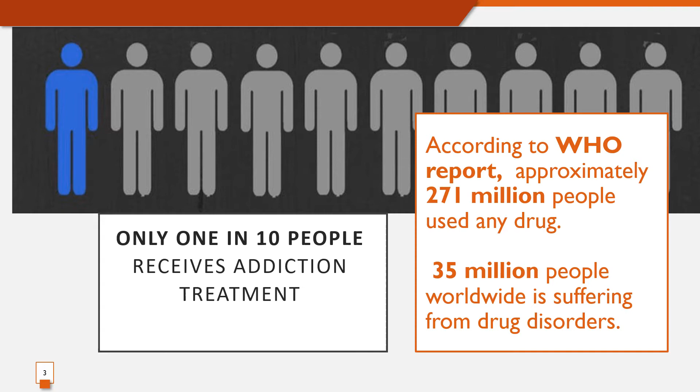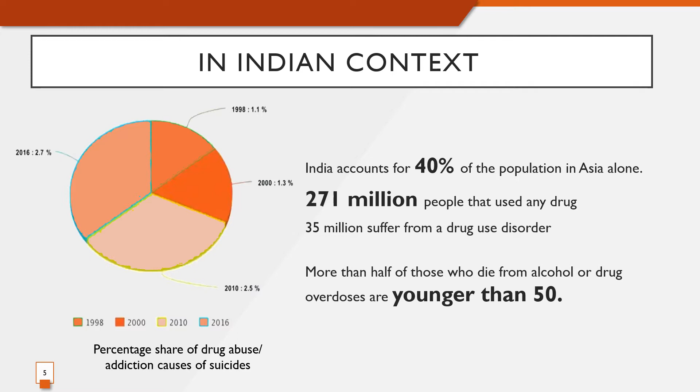Coming to the Indian context, this chart shows the percentage share of drug abuse or addiction causes suicides. It is clear that the drug abuse suicide cases increase over the years. More than half of those who die from alcohol or drug overdose are younger than 50.

With the new ages, there are many substances which are coming. Alcohol and tobacco have been the commonest, but newer substances like stimulants, like in the newspaper we read about the drug called MCAT, these are wrecking havoc on the lives of teenagers and adolescents. In many centuries, substance abuse has been a social problem.

According to the Kerala Anti-Narcotic Force, 1 in 3 uses drugs at least once during school year. 34.8% of the youths are addicted to drugs, liquor, or smoking. The population in Kerala for 2020 is 3.47 crore.

The actual number of alcohol-dependent individuals is around 2,08,200. According to the analysis of revenue from liquor sales in 2015, the revenue sale was approximately 12 crore, and in 2019 it has increased to above 14 crores approximately. Kerala has the highest per capita consumption of alcohol in India.

A total of 350 cases were charged in the last 12 months. The newspaper report in 2020 shows that the lack of alcohol kills more in Kerala than COVID-19. In the 6 days leading up to March 30th, Kerala recorded only 2 deaths from COVID-19, but at least 6 deaths from non-availability of alcohol. Therefore, the Kerala government has planned to open more de-addiction centers across the state.

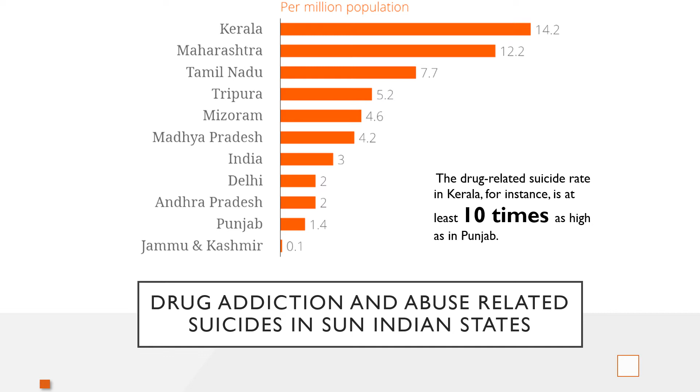Next, let me introduce my site. This graph shows the drug addiction and abuse-related suicide in some of the states in India. Kerala is 10 times higher than Punjab. In Kerala, the highest number of substance addiction is reported mainly in 3 districts, namely Trivandrum, Ernakulam, Kozhikode. In northern Kerala, the cases are higher in Kozhikode.

My site is located in Modakulur, Ulliyeri village in Kozhikode district in the state of Kerala, India. The site area is 10.03 acres, that is 40,621.80 square meters. It is located 500 meters away from the Malabar Medical College Hospital and Research Center. It is about 18 kilometers from Kozhikode city.

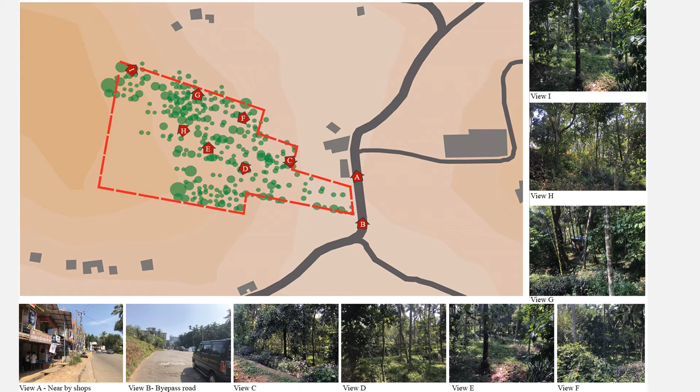The feasibility of the site is that it is well connected to a hospital within a close proximity of 500 meters, which can be accessed in case of any emergency. There is also an institutional campus at a radius of 1 kilometer, which helps in creating awareness among them.

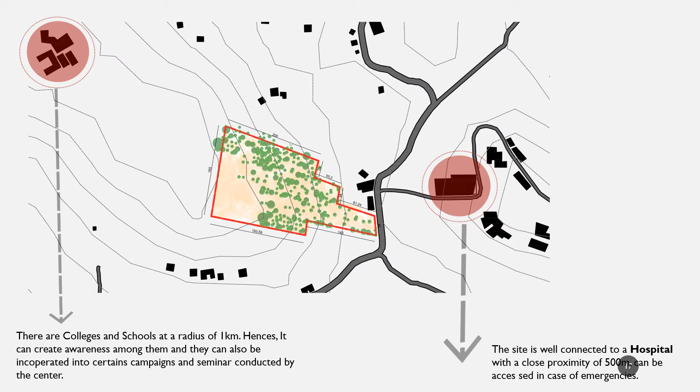The site is sloped with 2 meter intervals, and the highest point of the site is 8 meters from the road.

The case studies I have chosen for my thesis are Alpha Healing Center, Gujarat; Center for Harmonious Living, Kuttipuram; and Muktangan Rehabilitation Center, Pune. I have done a critical analysis of all 3 case studies based on a few parameters.

The reason I chose each of these case studies: for the first one, CHL, my idea for the design was to create a deinstitutional approach, and CHL matches with my concept.

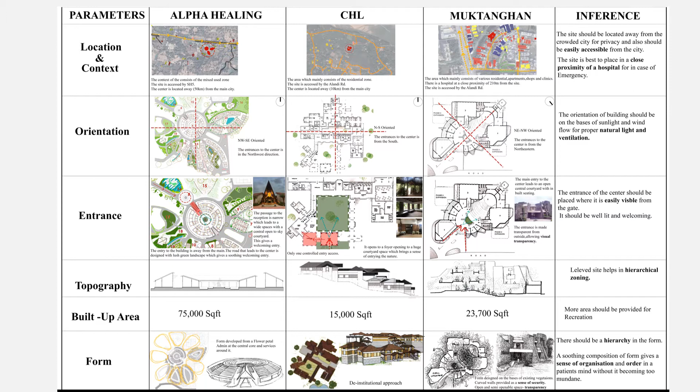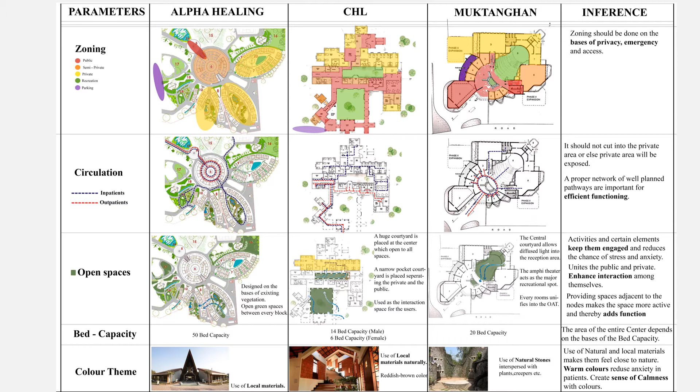For the Alpha Healing Center, the site area was approximately similar to my site area, so I wanted to study how they did the zoning of different blocks in the center and how they utilized the site area efficiently. I also planned on giving a central OAT that can act as an interactive space between the users.

And so I chose Muktangan Rehabilitation Center, as it also gives transparency between the users and staff.

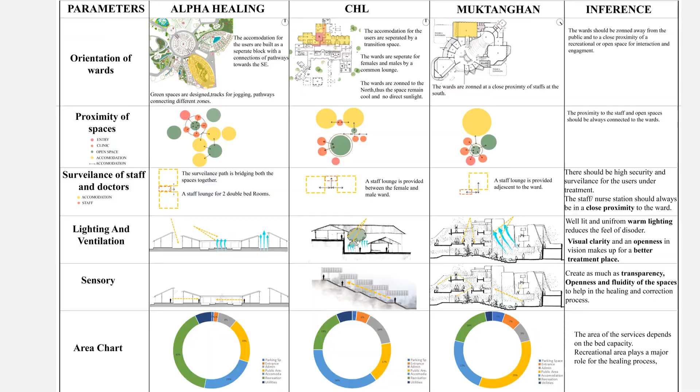Moving on to the major programming involved in the center, the 2 types of patients are inpatients and outpatients. The design shall house the following facilities: admin, outpatients, inpatients, care units, recreational facilities, and dwelling units.

The primary activities involved in the centers are consultation, counseling, therapy, self-help groups, detoxification, medical treatment, gym, yoga or meditation, outdoor games, indoor games, workshops, and camping.

Engaging in group therapy or activities is an essential part of recovery when it comes to substance abuse. Working in groups can have quite a few benefits for the individual, as they get to have the experience, learn new skills, gain insight, etc.

Moving on to the brief requirements of the center, let us first see the outpatient service. The initial consultation involves taking admission and then moving on to the intake process, which collects information about the patient's drug history. This is followed by evaluation of the patient's health through lab tests, after which the patient's treatment stages are identified, such as counseling, detoxification, therapy, etc.

Moving on to the zoning part, the site is initially split into 3 zones: public, which includes OPD, casualty, etc.; semi-public, which includes OAT halls, multipurpose halls, etc.; and private, which includes IPD wards, etc. The structure is zoned away from the main road access for noise buffer and privacy.

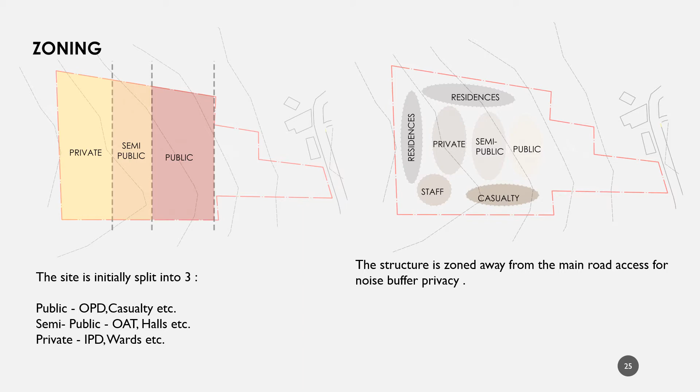Approaches to healing include removing stigma, incorporating interactive spaces, and creating spaces where people can come together and interact. Architecturally, this provides a platform for people to get back into their social place.

For zoning and conceptual development, the spaces are divided into 2 major spaces: the built space and the recreational space. Moving on to the design strategies involved.

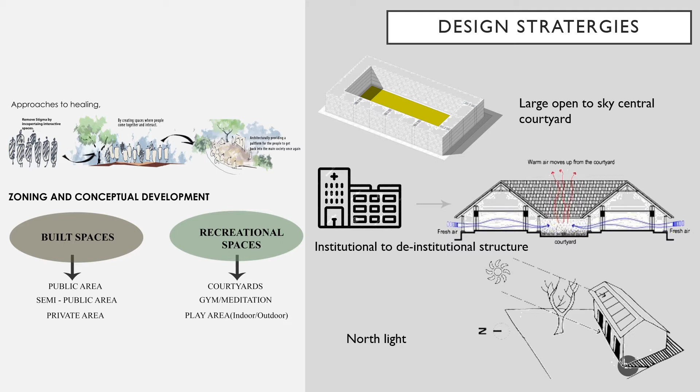First, a large open-to-sky central courtyard gives a sense of openness and also acts as a multi-purpose gathering space, moving from an institutional to a deinstitutional approach to give a homely feel, exposing users to fresh air and nature.

On the basis of sunlight, strategic tree planting around the structure can help protect windows from the late afternoon western summer sun. Shading devices, such as pergolas fitted to verandas, allow sun to penetrate the internal space while blocking harsh sunlight. Eaves and shading devices also protect windows from direct sunlight.

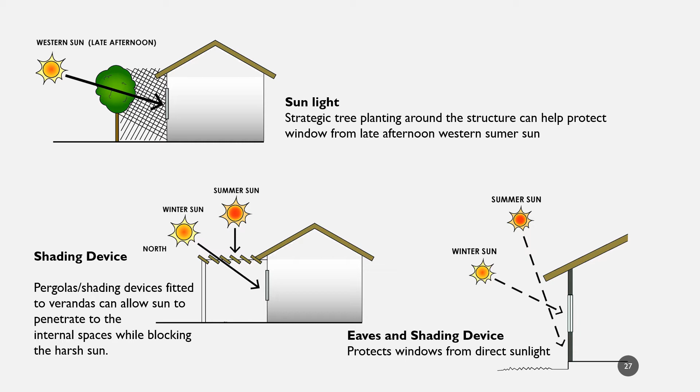The next major aspect is the interaction between patients and staff, creating open and semi-open spaces between them for maximum visual transparency, enabling secure and safe surveillance.

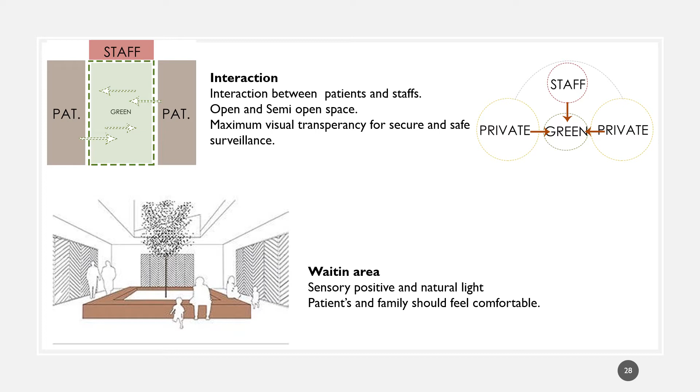The waiting area should have sensory-positive and natural light where patients and families feel comfortable. Planning the building around the courtyard reduces the heat entering the building and also acts as a semi-public gathering space between users.

The patients' and family accommodations are zoned in close proximity so they can interact and spend time together in a green environment, with naturally lit corridors using vertical shade elements to create rhythm.

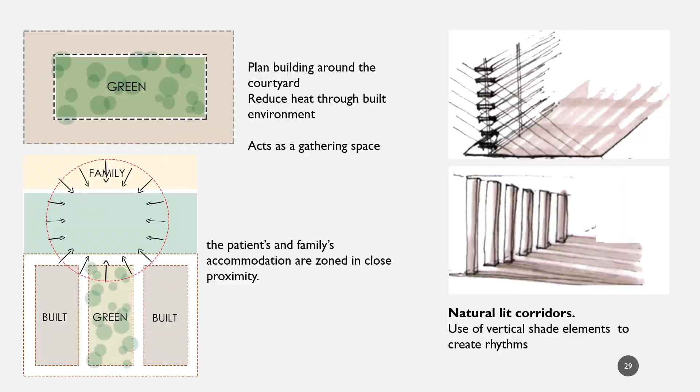Moving on to my design.

Onto the massing process. Considering the existing site, the site has 4 contours and is slightly sloped with 2 meter intervals. The highest point on the site is 8 meters from the road.

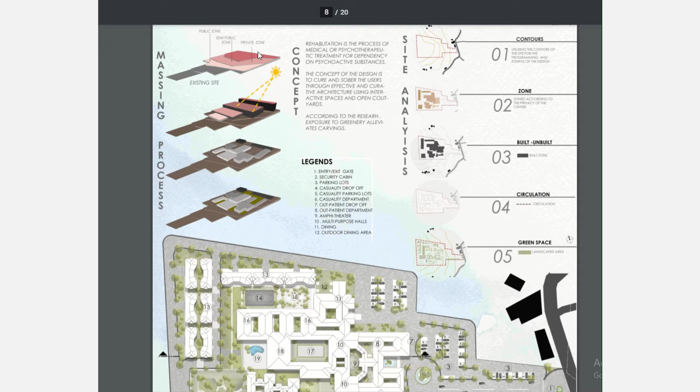The last 3 contours are split into 3 different zones, namely public, semi-public, and private, meaning each of these blocks is zoned according to privacy. Considering the brief required, the blocks have been zoned with maximum green space.

Moving on to the master plan. As mentioned in the program development, the center houses facilities like the admin block, outpatient department, inpatient department, care units, recreational facilities, and dwelling units.

This is the Kozhikode bypass road, which is the only access to the site. As you enter the site, you can see the entry gate, which has a security cabin to the left, and the road is split into 2 for both entry and exit, acting as a one-way direction.

To the right is the parking area, and as we move into the site, to the left is the drop-off of the casualty block and its parking. The casualty is connected by a semi-open corridor, which leads to the outpatient department.

7 is the drop-off of the outpatient department, and 8 is the OPD, outpatient department. 9 is the OAT, which acts as a semi-public interactive space and a transition space connecting the outpatient department and the semi-public hall, which is number 10.

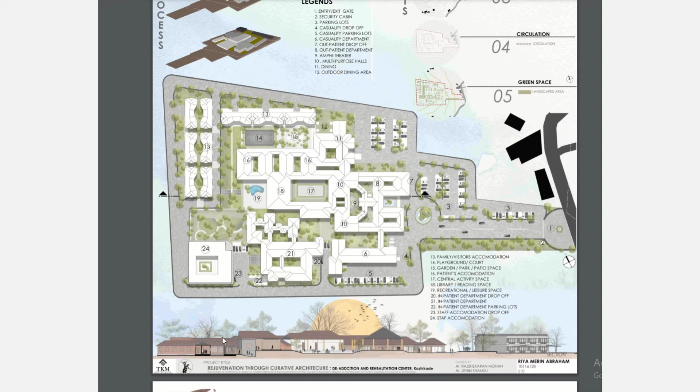This is the OPD corridor block. From there you can see a stepped outpatient OAT, which acts as a semi-interactive space. This is the central activity space where maximum interaction happens, and you can see the corridor that connects them, and this is the garden space for them to leisure around, and this is the staff accommodation.

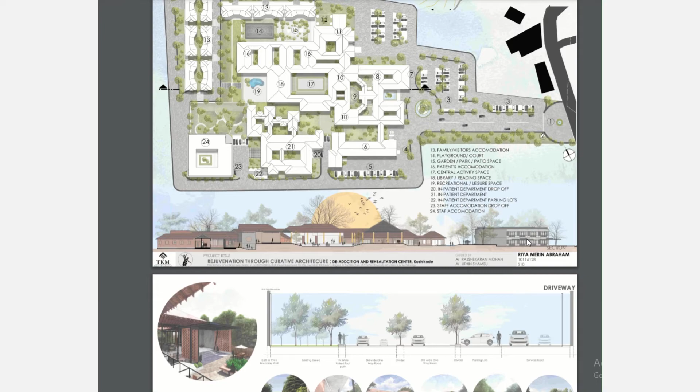This shows the section of the road driveway to the center. The boundary wall encloses all sides of the site. The existing green is left as much as possible, with a 1 meter wide raised footpath for pedestrian access. The road is segregated by a divider for separate entry and exit access to the center. The parking is buffered by trees.

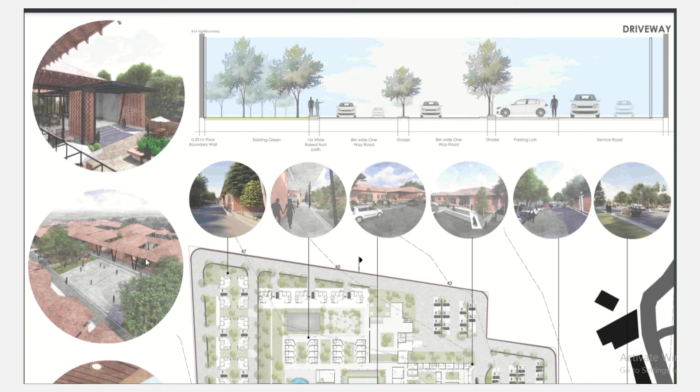The first view is from the dining, that is from here. The second view is to the court. The third view is from the central area, the fourth is the view to the garden, and the fifth is the pergola walkway that connects the central activity space.

Now the section that cuts through the IPD, central activity space, the patient's accommodation, and the garden.

Now coming to the section, this is the family visitors cottage, and this is the open garden that lies between the family and the patient's accommodation. It has a 2 meter wide open corridor, and these are the family accommodation.

Patient's accommodation, and this is the 5 meter wide corridor which is semi-open. On both sides there's a 5 meter wide corridor that opens to the central activity space, and then comes the laundry room which is adjacent to the 5 meter wide corridor. To the right side you can see the IPD block, which cuts through the canteen, the IPD entrance, and the IPD office room. And this is the view of the entry to the outpatient department.

This is an axonometric view of the center. This color shows the circulation in the structure, and this color shows the green spaces within the structure.

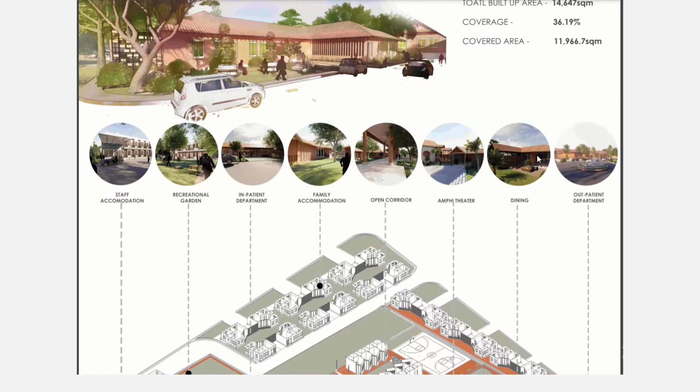This is the outpatient department view, entry of the outpatient department, and this is the view of the dining, the exterior eating area, and this is a semi-public amphitheater view, and this is the open corridor that opens to the central activity space. This is the family accommodation view.

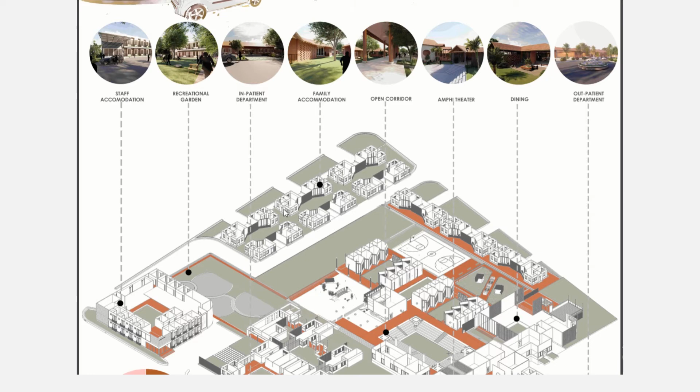This is the inpatient department view, and this is the recreational garden that lies between the hostel accommodation and the family area. This is the staff accommodation for the staff.

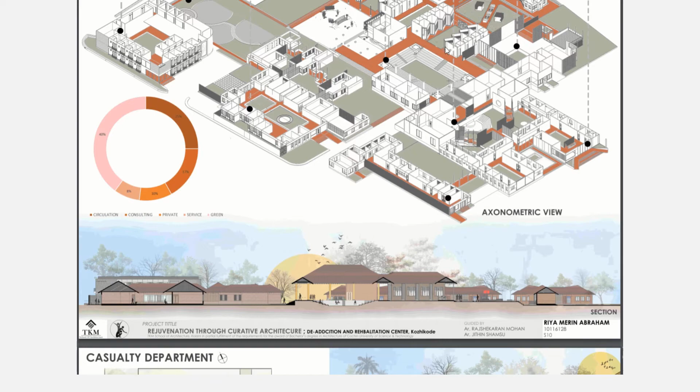Coming to the section, this section cuts through the outdoor counseling center, and then the inpatient department, the central area, and the patient's accommodation. Moving on to the different departments of the center, first comes the casualty block.

The entry to the casualty block is directly from the main road access. It is done so that in case of any emergency, you can directly enter the unit. It is linearly planned, a singly loaded corridor for easily accessible spaces.

This is the elevation of the casualty block. This is the ramp entry, and this is the stepped entry, and this is a corridor that connects the outpatient. This is a semi-openable corridor that connects the outpatient department.

This view is from the reception area to the corridor, and this is the 3 meter wide corridor. This is the corridor that connects the outpatient department, the way to the outpatient department.

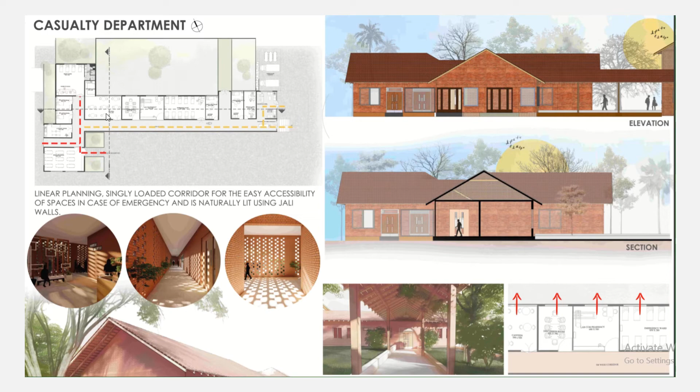This section cuts through the singly loaded corridor and the canteen. This is a view of the semi-openable corridor, and this is the way or the door to the outpatient department. Every room opens to the garden for natural ventilation and lighting.

It is a sloping roof structure. The corridor is naturally lit using jali walls.

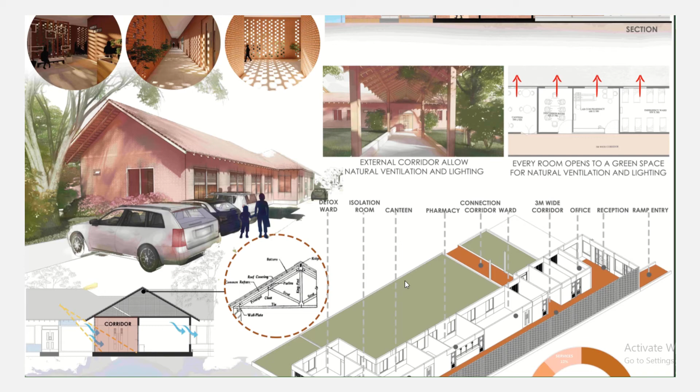This is the axonometric view of the casualty block. This color shows the circulation, and this color shows the green spaces involved in it.

This is the ramp entry to the unit, and this is the reception area. The office, the 3 meter wide corridor, the connection corridor that connects the outpatient department, the pharmacy, the canteen, isolation rooms.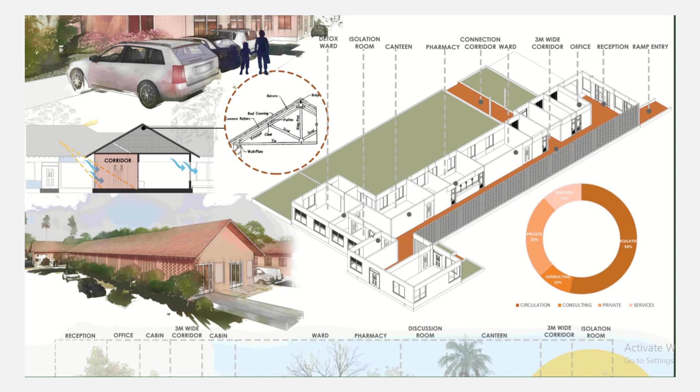Coming onto the section, it's cut through all the rooms: the reception room, the office cabin, 3 meter wide corridor, doctor's cabin, the detox ward, pharmacy, discussion room, canteen, 3 meter wide corridor, and isolation room.

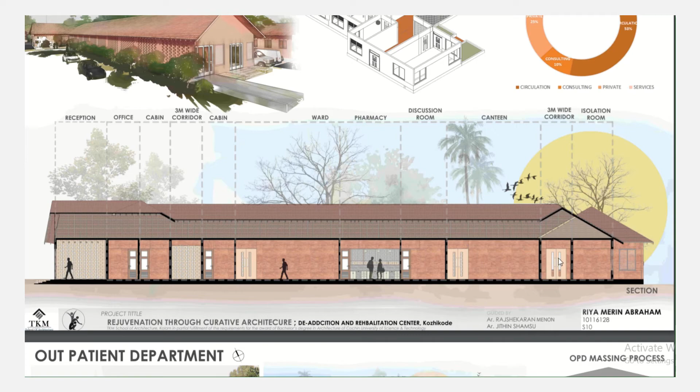The outpatient department. Moving on to the massing process, first is a box and then it is divided into three parts, each at different levels like admin, ward, etc, and then finally this form.

The block includes both the outpatient department and a semi-public space, which is connected by an OAT. The block is built using exposed bricks.

As you enter the outpatient department, you will first see a sensory positive and naturally lit reception and a waiting area, which makes the family and the patient feel comfortable as you enter. The admin is placed right beside the entry for admission and further procedure.

The plan is symmetrically divided with wards, observation wards, doctor's cabin, etc.

This is the view that shows the entry point to the outpatient department. This is a lounge view that shows the waiting area, and this is the entry view. That door is the office space.

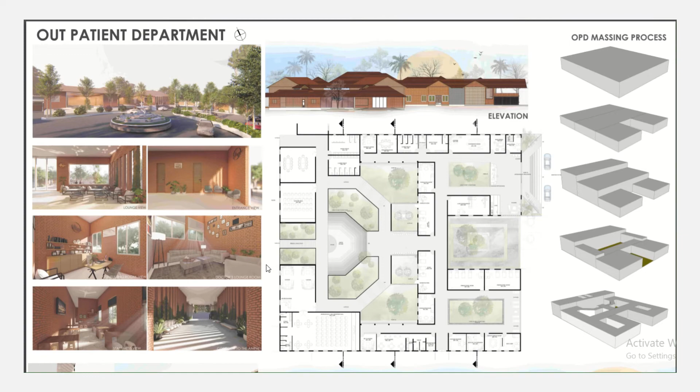This is the doctor's consultation room. This is the doctor's lounge room for them to relax, and this is the staff mess or the canteen space for the staff to have their food.

This is the corridor to the amphitheater. As you walk through this corridor, you'll see directly the amphitheater, which is a semi-public space for interaction.

This is the section that cuts the multi-purpose OAT. This is the multi-purpose hall, and this is the OAT, and this is the toilet for the multi-purpose users.

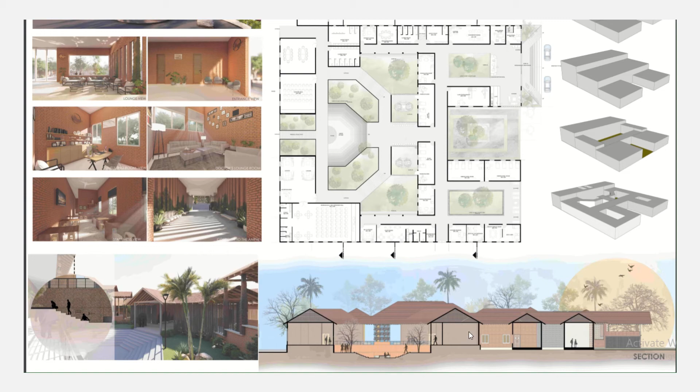This is the axonometric view of the outpatient department, where this color is the circulation and green is the open green space. This is the entry or ramp entry to the outpatient department.

The offices for admission and for the procedure. This is the reception desk. This is the observation ward, and this is the wards with adjacent private courtyards for them to use.

And this is the public toilet for the multi-purpose users. These are the private courtyards. This is the amphitheater for semi-public users. These are the doctor's lounge, and this is the multi-purpose hall.

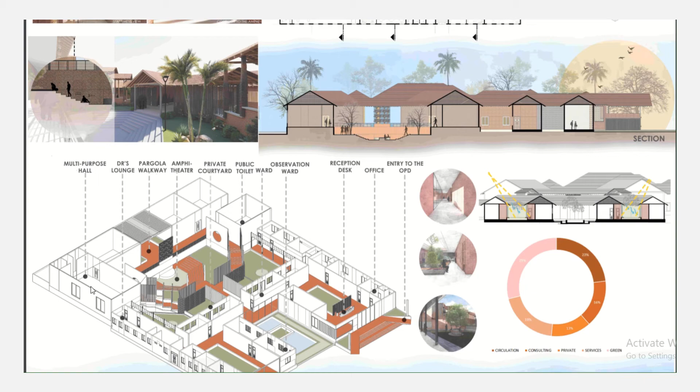This is a view that shows the corridor, and this is a view of the inbuilt seating area, and this is the private courtyard view.

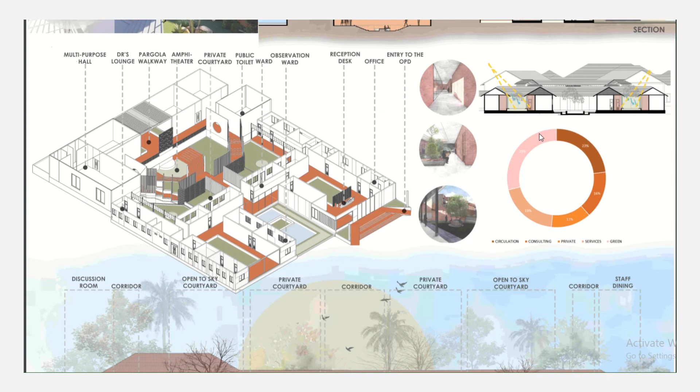There are courtyards on either side of the wing, which let natural light and air inside. This is a section that cuts through the courtyards. This is a discussion room, a 3-meter wide corridor, open to sky courtyard, a private courtyard that connects.

This is for the ward users. And this is a corridor that leads to the amphitheater, and this is a private courtyard. This is exactly the same as the other side, it's symmetrical.

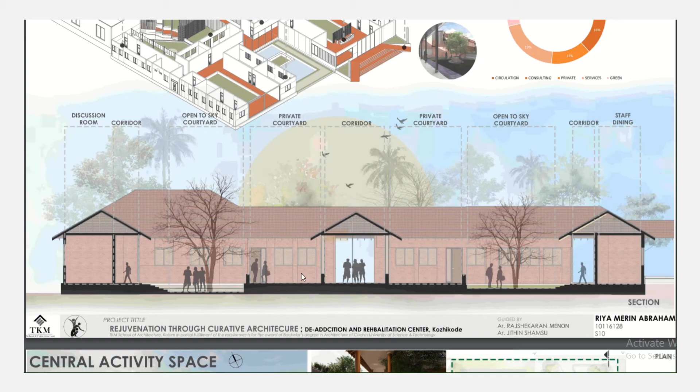Central activity space. This space acts as a central spot for the entire rehab. Interaction between patients is developed higher here, and hence most of the greeneries are designed in this space.

Semi-open 5-meter wide green corridor. This space mainly opens to the huge central activity space. It is enclosed by a corridor providing air and sunlight. It keeps the users in contact with the natural environment. A huge size of the amphitheater gives an open atmosphere and makes them feel free.

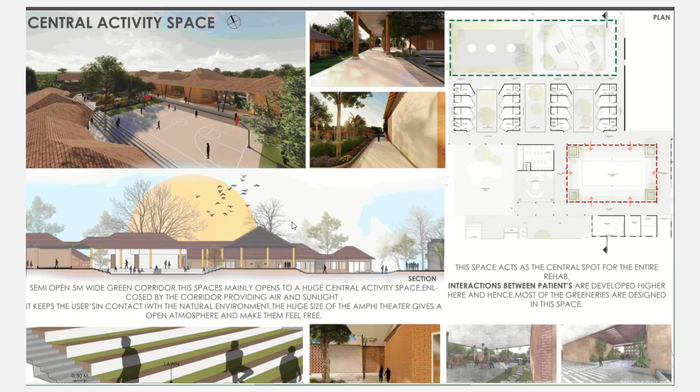This is a detail of the seating area. Its riser is 0.10 meter and its tread is 0.30. It is 0.02 meter raised stone seating with lawn inbuilt.

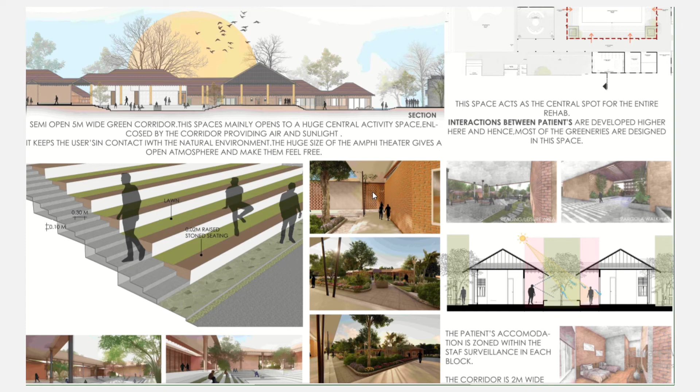This is the indoor reading area, and this is a pergola walkway. This is the view of the corridor from the patient's accommodation, and this is the view to the garden.

Coming on to the patient's accommodation, this is the axonometric view, and this color is the corridor or walkway that connects throughout, and this is a green space.

The interior has got a bedroom and an attached toilet for the patients. The patient accommodation is designed in such a way that it provides a view to the green, a common open courtyard in between two blocks for the users to interact between them.

The patient's accommodation is zoned within the staff surveillance in each block. The corridor is 2 meter wide and it's semi-open. A library is provided in the mid zone of both the ward and the patient's accommodation for use.

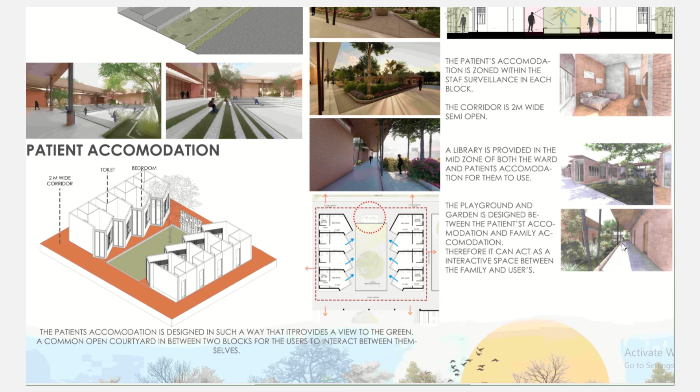The playground and the garden are designed between the patient's accommodation and family accommodation. Therefore, it can act as a space between the family and the users. This is also the section that cuts the central and the patient's accommodation and the green garden.

Dining space. This dining is mainly designed for inpatient users and their family. This place also acts as an interactive space and therefore it is provided with interior and exterior deck dining space.

This is also a space for the users to interact with their family and is in close proximity to the family cottage and IPD. These are some of the interior views of the dining space.

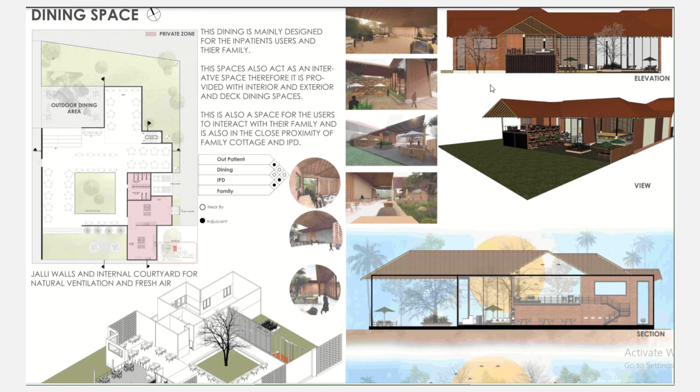This is the axonometric view. This is the outdoor seating area and it's surrounded by green spaces. The jali wall and internal courtyards provide natural ventilation and fresh air.

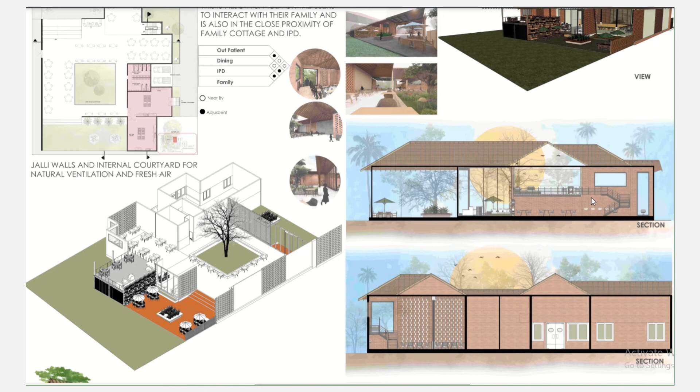As you can see from the section, there's a deck dining space which connects through the stairway. This is the view from the outdoor seating, eating area.

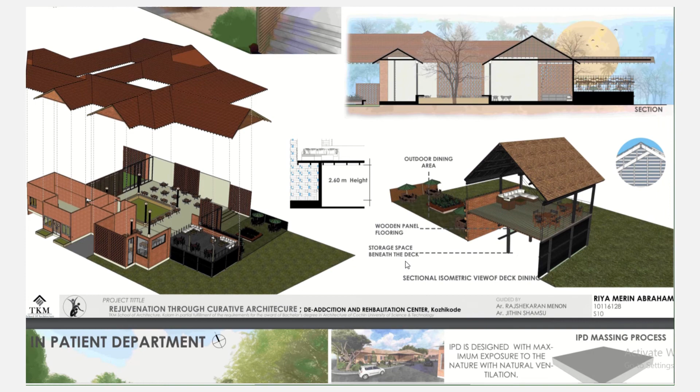There's a deck space that is 2.6 meter in height. This is the isometric view of the deck dining. There's a storage space beneath the deck and it has got a wood panel flooring, and this is the outdoor dining space.

Inpatient department. Initially a box, then it is divided into 3 wings: ward, recreation and doctor's cabin. Introducing some open space courtyards and enclosed courtyards. IPD is designed with maximum exposure to nature with natural ventilation. It also includes interaction with other patients with good surveillance.

Speaking about the plan, it has got 2 entry points on either side. As you enter, you can see a huge courtyard that lights up the entire space. These are the office spaces and this is a reception space that has a good view towards a green space.

These are the counseling and doctor's cabin. These are the 3 wings, these 2 are the wards that have attached toilet and balcony. This is the gym and the yoga area.

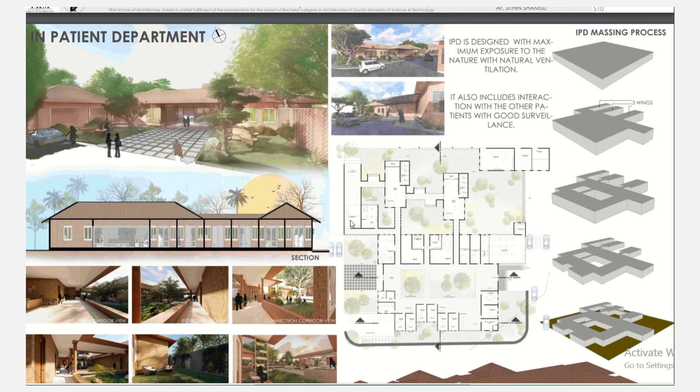This is a view that shows the view towards the corridor. This is the inpatient department corridor view. This is the corridor that connects the 2 wards.

Every counseling or consulting space has its own outdoor green enclosed space, which is enclosed by a barrier wall 3.10 meters high. This is a walk-talk outdoor area where you can walk and talk into the green space.

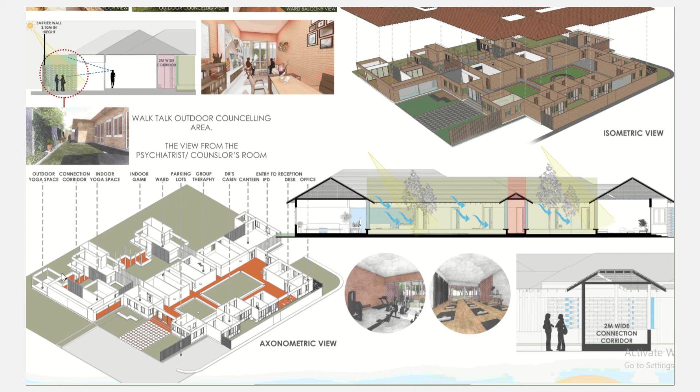This is the interior view of the doctor's cabin that overlooks the green space. This axonometric view shows where red is the circulation and green is... you can see it's all around the center.

This is the entry of the IPD. This is the reception desk and its office space. This is a canteen for the staff, and these are the doctor cabin units. This is a group therapy space. These two are the wards. Then comes the indoor yoga space, the connection corridor that connects both the wards.

This is the outdoor yoga space. These two are the views. This is the view of the yoga gym and this is the yoga space. There's a 2-meter corridor, a connection corridor that connects the two wards.

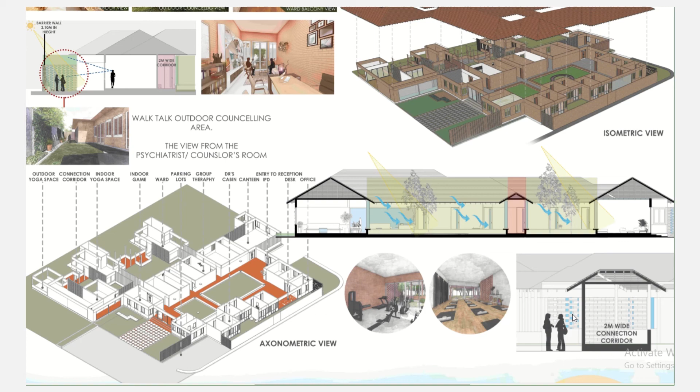This is a section that cuts the outdoor counseling area, which overlooks into the green space, the doctor's cabin, the corridor, the open-to-sky corridor that lights up the entire space, the group therapy that overlooks the enclosed green space, and then the connection corridor that connects the ward.

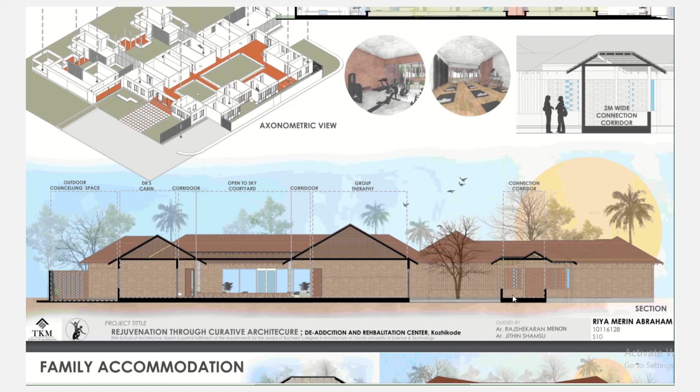Family accommodation is mainly designed for the patient's family or visitors visiting them, or any other guest. It is designed as a cluster of 2 and 4. This plan shows a cluster of 4 units which has a central open garden. It has both vehicular and pedestrian access.

These are some of the views of the family accommodation. This is a section that cuts through 2 units and a central garden, which acts as an interaction space between the neighbors. These are the interior views of the unit.

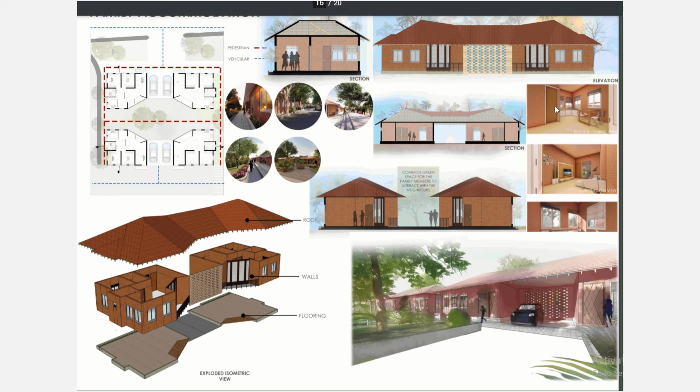This is staff accommodation for the staffs.

Materials used: exposed brick and plastered laterite masonry, wood, MP roofing and ceiling tiles. Most of the materials are sourced locally and are kept exposed to show the genuine texture. It gives the building a rustic and down-to-earth appearance. The natural light and tons of cool air are always welcome as a result of the open design.

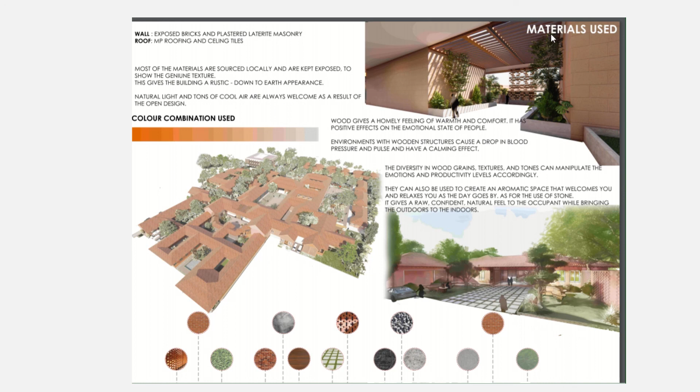The color combination used are these. Wood gives a homely feeling and warmth and comfort. It has a positive effect on the emotional state of the people. The materials used are...

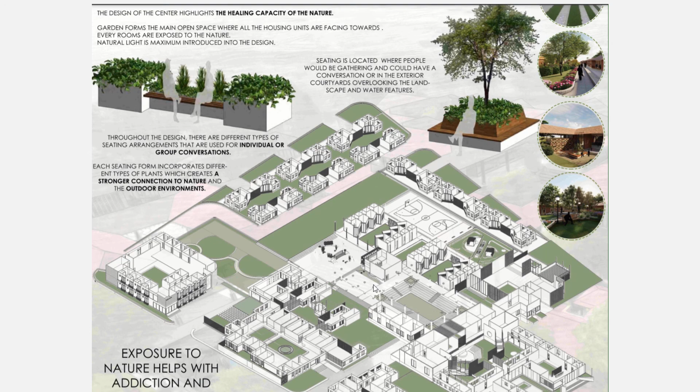Landscape schemes: the whole master plan is designed in such a way that it is intricately connected with nature. The design aims to change the stereotypical image of the rehab center and create a welcoming and comfortable environment for the users. The design of the center highlights the healing capacity of nature.

Garden forms the main open space where all the housing units face toward it, and every room is exposed to nature. Natural light is maximized in the design.

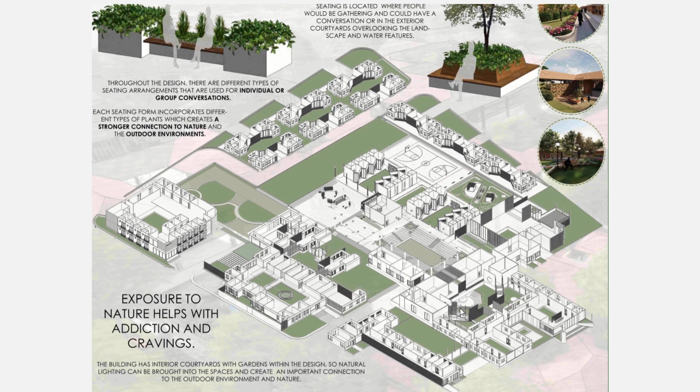Throughout the design, there are different types of seating arrangements used for individual or group conversation. Seating is located where people would be gathering and could have a conversation, or in the exterior courtyards overlooking the landscape and/or the water features.

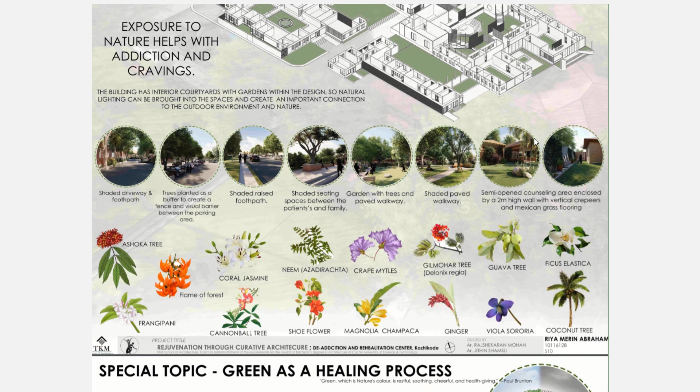These are some of the views of the design. The first one shows the shaded driveway and the footpath. Trees are planted as a buffer to create the fence and visual barrier between the parking areas: the shaded raised footpath, shaded seating spaces between the patients and family, garden with trees and paved walkway, shaded paved walkways, semi-opened counseling area enclosed by a 2-meter high wall with vertical creepers and Mexican grass flooring.

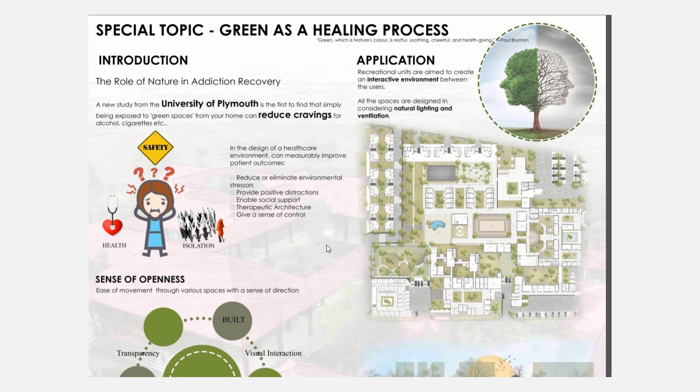These are a few of the plants. The special topic I chose is green as a healing process. A study from the University of Plymouth found that being exposed to green spaces can reduce cravings for alcohol, cigarettes, etc. So the initial step I took was bringing in transparency, visual interaction and connection between them by introducing green spaces between the built spaces, ease of movement through various spaces with a sense of direction.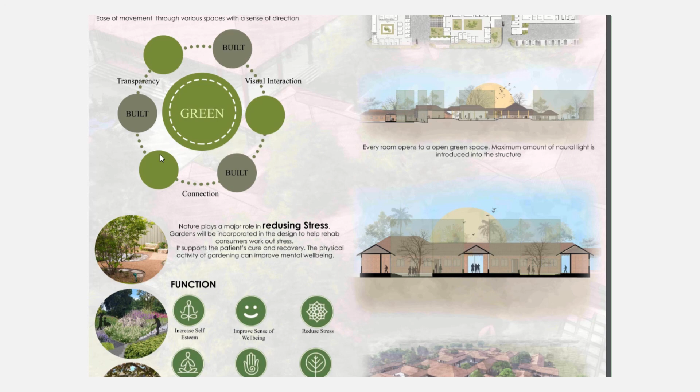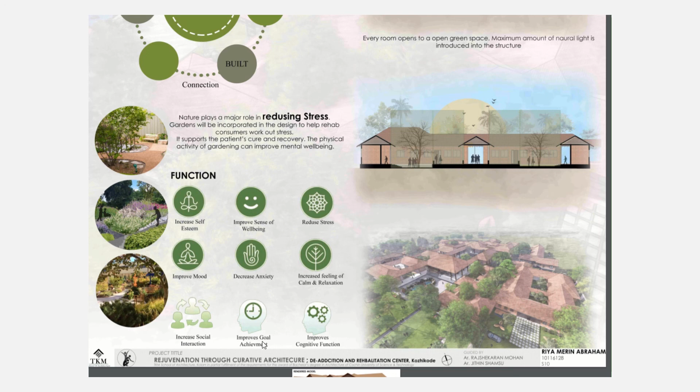Nature plays a major role in reducing stress. Gardens will be incorporated in the design to help rehab consumers work out stress. The major function that the green space helps with is increasing self-esteem, improving sense of well-being, reducing stress, improving mood, decreasing anxiety, increasing feelings of calm and relaxation, increasing social interaction, improving goal achievement, and improving cognitive function.